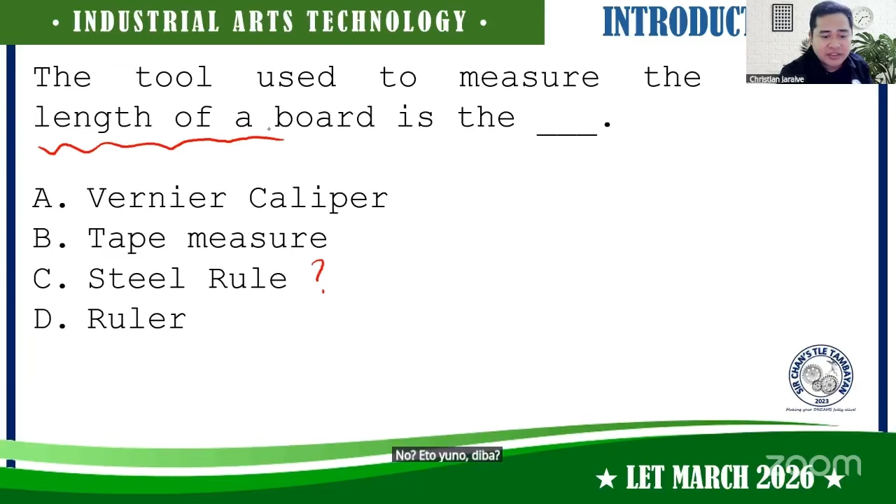And you'll use a steel rule? Are you sure? This is it, right? This is our steel rule. This is the vernier caliper. This is the tape measure. In the absence of a pull-push ruler, teachers, this is what you need to remember.

In the question in terms of length, in the absence of a pull-push rule, there should be a tape measure.

Sir, that's not right. The tape measure is just for sewing. Are you sure? Who told you the tape measure is just only used for sewing? No, it's not. It is a measuring tool, a flexible measuring tool.

But sir, can you use the pull-push rule? If pull-push rule is present on these choices, the best answer is pull-push rule. But since pull-push rule is not present on these choices, tape measure is the best answer here. Do not answer steel rule.

Because steel rule is just limited to one ruler only. Sir, we have steel rules that are 1 meter, sir. That's rare. Usually, teachers, for length we really use tape measure or pull-push rule.

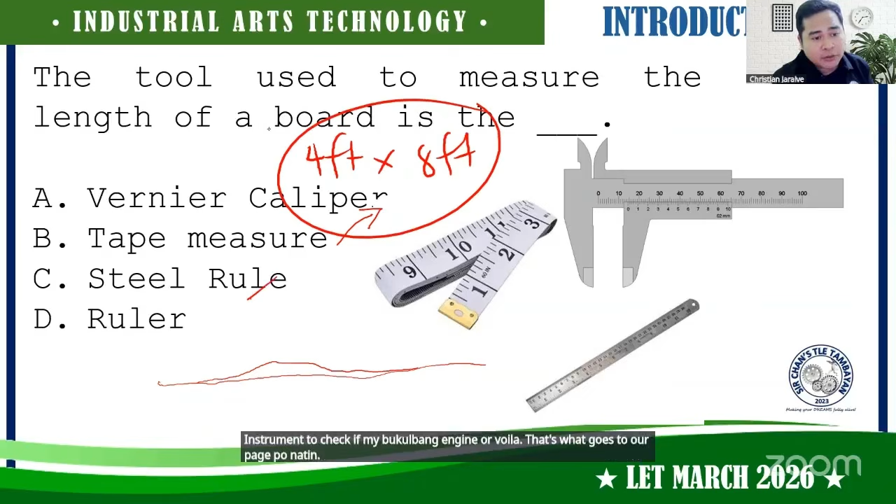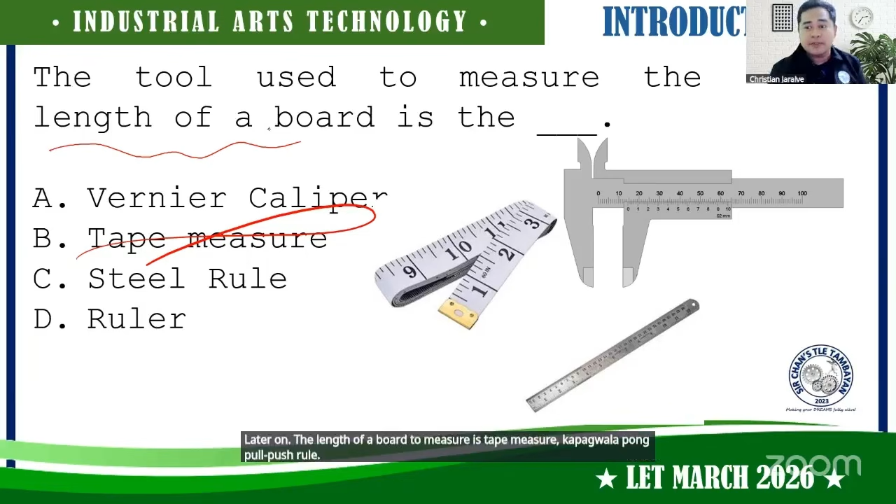More on these questions in our automotive technology, carpentry, and masonry - we'll go back to all this later. The length of a board to measure is tape measure when there's no pull-push rule. Okay, let's proceed to the next question of the night.

The standard unit of electric current - volt, ampere, ohm, watts. Again, the standard unit for electric current is ohms, volts, ampere, ohms, and watts.

What's the answer here? Standard unit, electric current. When current is the topic, teachers, I always associate this with A - AMP. Like the friend who texts you AMP when they won't go to the gimmick, whatever you want AMP to mean, where are you now? Teachers, the standard unit for electric current will always be letter B, ampere.

Ampere, that's it. Sir, we were asked this in the board exam - which of the following refers to electric potential difference?

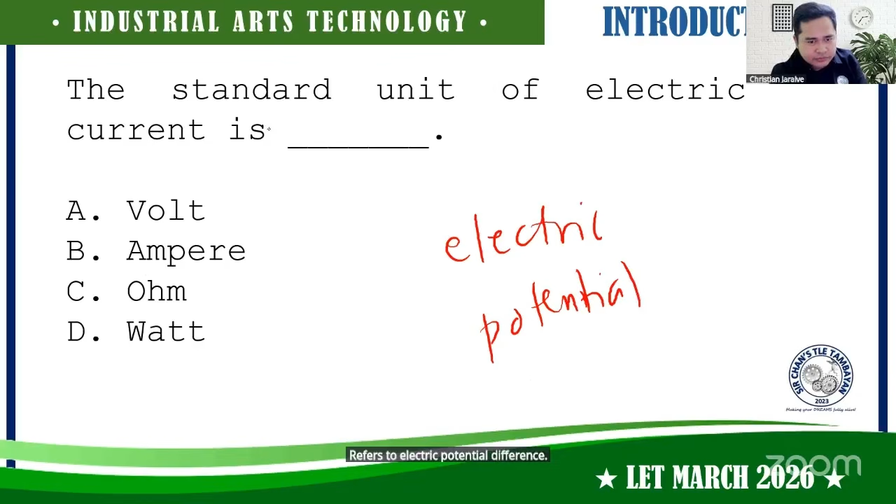Sir, alin sa letter A, B, C, or D ang tinatawag na electric potential difference? Oh, that's letter... teacher's voltage. Voltage po yan siya, by virtue ng ating Ohm's triangle po natin.

Alin naman ito yung resistance? Di ba resistance siya yung pumipigil upang hindi makadaloy ng maayos ang kuryente? Resistance is anything that opposes the flow of current natin. And resistance is measured by the unit ohms.

Sir, ito yung kung gaano kalakas yung produce ng current voltage, current and voltage po, sir. It is the result of the combination, the power of voltage and current. Di ba ito yung wattage natin? Watts is always the product of voltage and the current po natin. It is the power or electric power po natin.

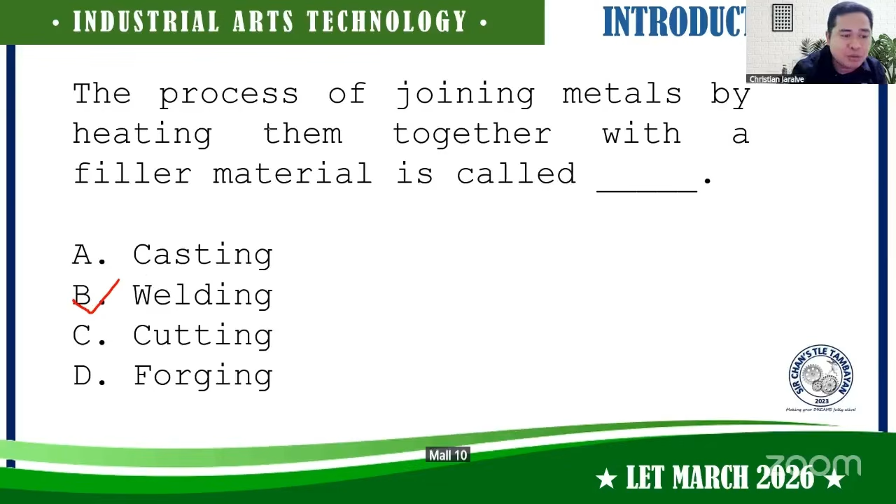What word do you associate with the word casting? Mold or melt? Molten metal, di ba, melt. Ang natunaw, no? Ang tunaw na metal natin. Tunawin para wala nang kurap. Tunawin ang mga kurap daw. Uy, grabe ka silong, ha?

Cutting, di ba? Pag sinabi ting cutting, that's a simple term. Removing, no? Huwag niyo nang guluhin yung isipan niyo, teachers. Just cutting, just removing.

Forging. Ano yung forging? What is forging or what term do you associate with the word forging? Uy, isubo. Grabe ka naman silong kapag mag-forging. Subo agad? Hindi. I-shape mo muna, himas-himasin mo muna, i-shape mo muna, di ba? Compress, shape, press, no?

Ay, nako, binababa ata yan din. So, ay, nako, teachers. Ano? Shaping metal through the use of heating is forging po natin. How do we shape metal? We now use hammering procedure, no, hammering. Okay? Yan po yung teachers.

That is actually forging po natin. The process of cleaning, oiling, and checking of tools regularly is called tool maintenance. This is actually called as tool maintenance po natin.

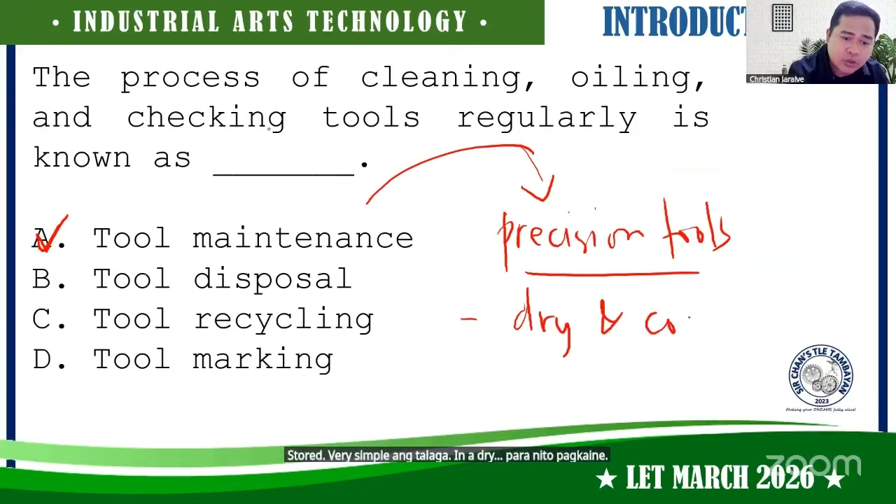Therefore, in terms of tool maintenance teachers, after niyo po silang linisan, lalagyan niyo po sila ng lubrication. Bakit? Habang nasa-store po sila, hindi po sila kinakain ng kalawang. At the same time, hindi po ma-affect yung kanilang precision. So saan nga ba to store yung ating mga precision tools? Precision tools teachers are actually stored very simple lang talaga, in a dry and cool places.

In a dry and cool places. Diyan lang po yung tamang tool maintenance po natin. Tool maintenance, it actually gives you the idea of taking care of tools and keeping them in good conditions. Yan po yung tool maintenance po natin. Tool disposal, tool recycling, tool marking are actually other terms po natin ito.

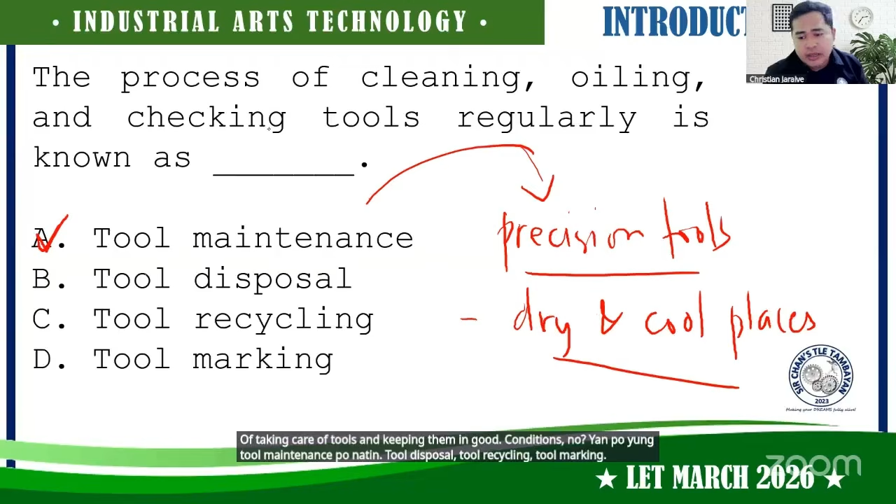Alright, next question of the night. The unit of measurement for the length in metric system is letter A, yard, letter B, meter, letter C, foot, letter D, inch. Isipin niyo ito mabuti kasi ang pinag-usapan dito, unit of measurement. So kapag unit of measurement, tama A, B, C, and D.

Tapos kapag length, si yard ba pang length? Yes. Si meter ba pang length? Yes. Si foot at saka si inch, all of them are for length. Pero sir, ano pa yung next condition? Ito yung next condition, no? Metric system. Is yard a metric system? Yes or no?

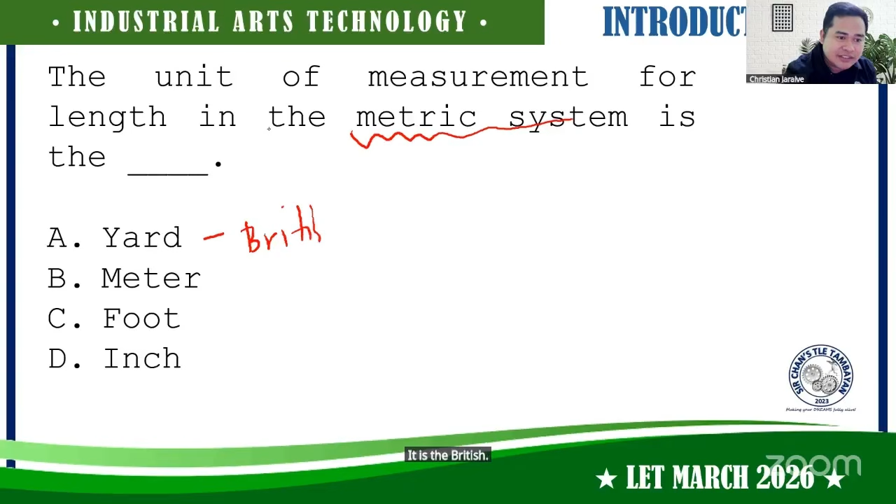Is yard a metric system? Yes or no? Walang sagot sa tanong. Hindi po siya. If it's not a metric system, what type of system po siya? Standard ba siya? It is the British or English unit of measurement system natin.

That's yard. What about meter? Is meter a metric system? Of course, yes. Foot is not, this is British or English measurement system natin. Inch is also an English measurement system natin. The best answer here is meter.

Ito yung nakakatuwang tanong last time. Convert daw 3 inches into centimeter. Naku, naguluhan ng taong bayan sa board exam, kasi simple lang daw yung question, kung nakalimutan nila yung conversion. O, di ba may mali agad?

36 daw? Are you sure, Zilong? 36? Times 12? O, di ba? Sabi nila, sir, madali lang naman yung board exam namin, naguguluhan lang kami sa measurement, kasi hindi nyo kasi tinatandaan yung basic.

Ito pa isa. Sabi ng isa dito, sir, times 100. Paano dito? Paano naging 100 yan?

Oy, teachers, pero again, nakakatuwa po kayo with your interaction po. Don't worry, nagkakamali po kayo, anyway, it's just part of learning po natin. You continue participating para at least you can learn something.

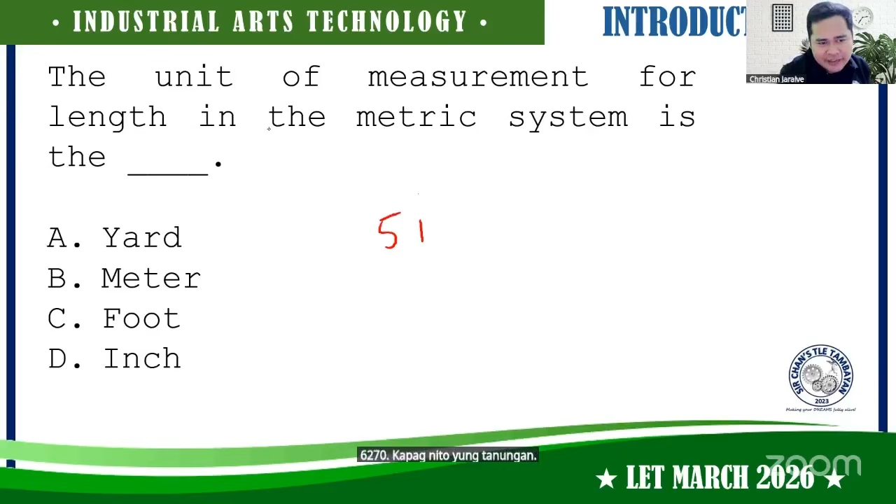5 inches convert into millimeter. Hala, di ba? Sir, paano sir kapag ganyan yung tanungan? 5 inches convert to millimeter. Very simple lang din.

Ilang mm ba meron? Ayan, so 1 inch is equal to 2.54 centimeter is equal to 25.4 millimeter. Simple lang yan. Just copy this one, just take a screenshot on that. That is very simple, so you just have to multiply 5 inch into 25.4 mm and it will give you the answer already. More on this one sa calculations natin sa atin pong carpentry sessions natin.

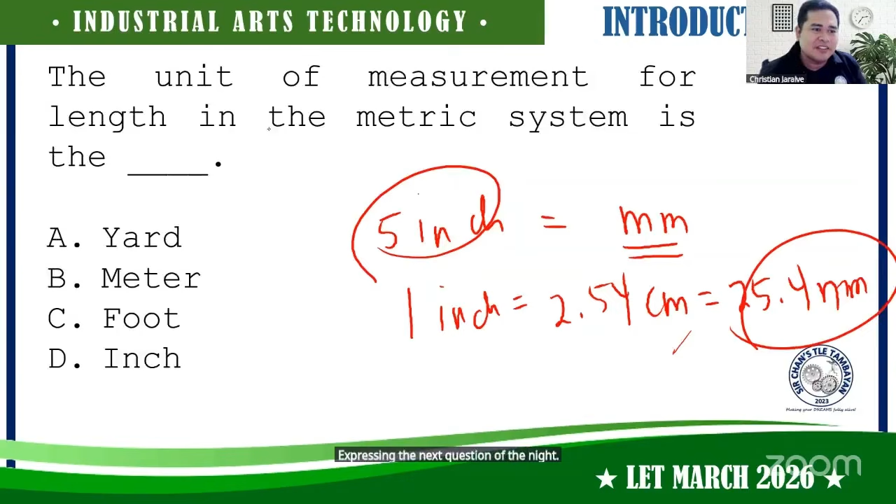Let's proceed to the next question on the night. The act of using one skill to start a livelihood project is an example of letter A, entrepreneurship; letter B, employment; letter C, apprenticeship; letter D, membership. One skill converting into livelihood project, of course, entrepreneurial activity.

Kasi po teachers, sa entrepreneurship po natin, we have to consider the analysis called SWOT analysis. Ano nga yung SWOT? Strength, weakness, opportunity, and threat po natin. Because starting a business gives you strength, weakness, and all other dimensions of business natin ng mga projections. Kaya we can always associate this one as one skill into a livelihood, that is exactly what we call entrepreneurship.

Next question of the night, in construction, PPE like a hard hat protects the worker from letter A, falling objects; letter B, noise; letter C, heat; letter D, cold air. Di ba hard hat natin? Sir, wala pong hard hat. Pero ano po ba yung mga ibang katawagan ng hard hat teachers?

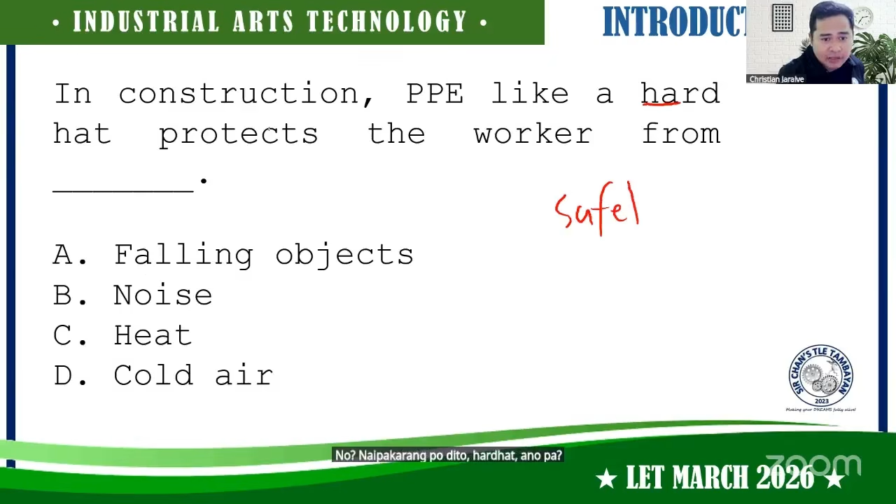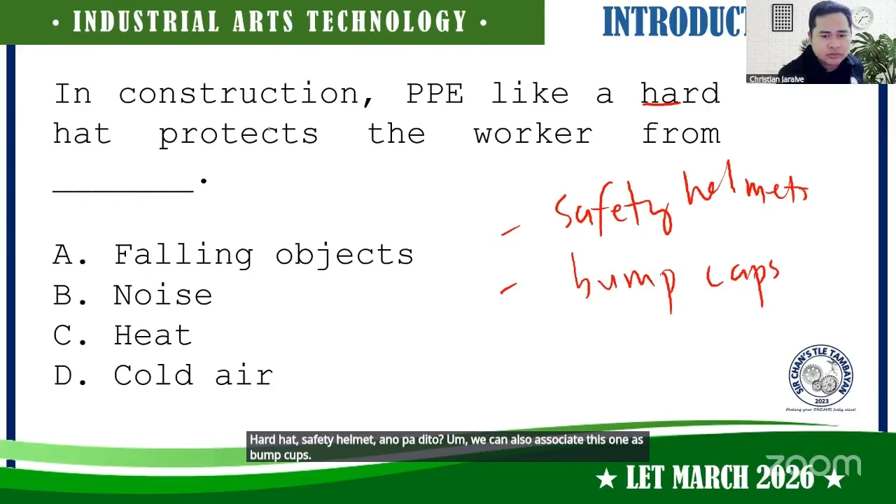Napakarami po dito. Hard hat, ano pa? Safety helmet. Hard hat, safety helmet, ano pa dito? We can also associate this one as bump caps. Marami yan teachers, ano? Hard hat, safety helmets, bump caps.

Actually, all of them is a PPE that is protecting you from falling object, from falling debris, falling materials, pero hindi sa fallen na puso. Hindi ka gumamit ng hard hat para sa fallen heart. It's only for the falling objects.

Ang noise naman, teachers, this is earmuff. Ano yung heat natin? Sir, maraming heat po tayo, di ba? Karasan gloves to eh. Yan, cold air, we also have our insulated coating natin or thermal headgears. So that is our thermal headgears.

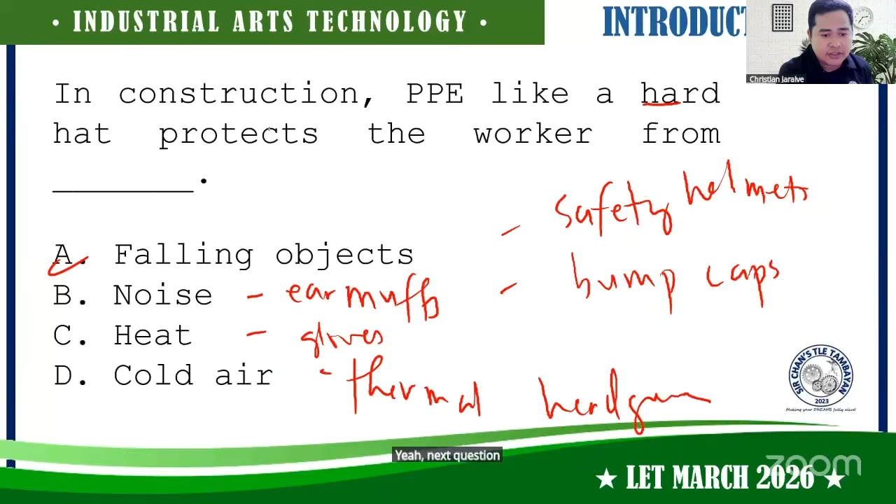Next question of the night, teachers, is the most important rule in the workshop is, of course, you should always do safety muna bago ang lahat. Speed will just come after, once there will always be safety in the workshop.